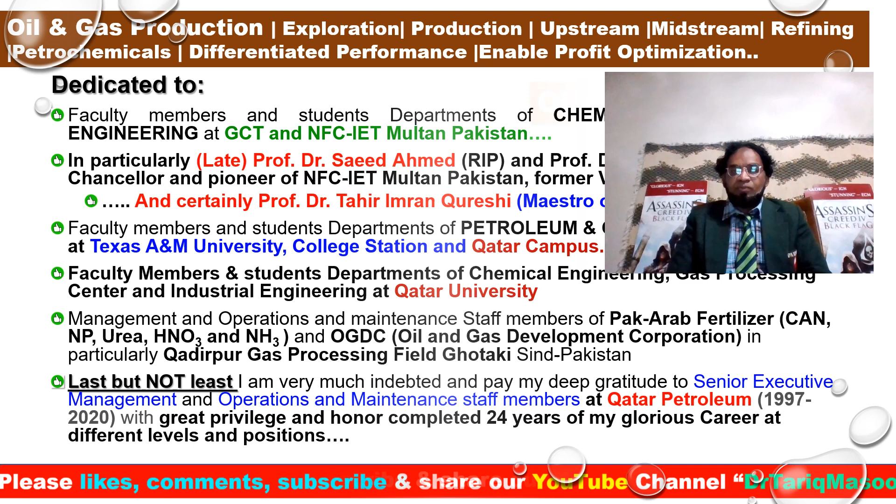Okay, oil and gas production, this is my plan. Introduction, facilities and process, reservoir and wellhead management system, upstream facilities, midstream facilities, refining facilities, petrochemicals, utility systems, unconventional, conventional resources and environment effects. These areas will be covered over the next couple of years. I have a plan to deliver 300 lectures.

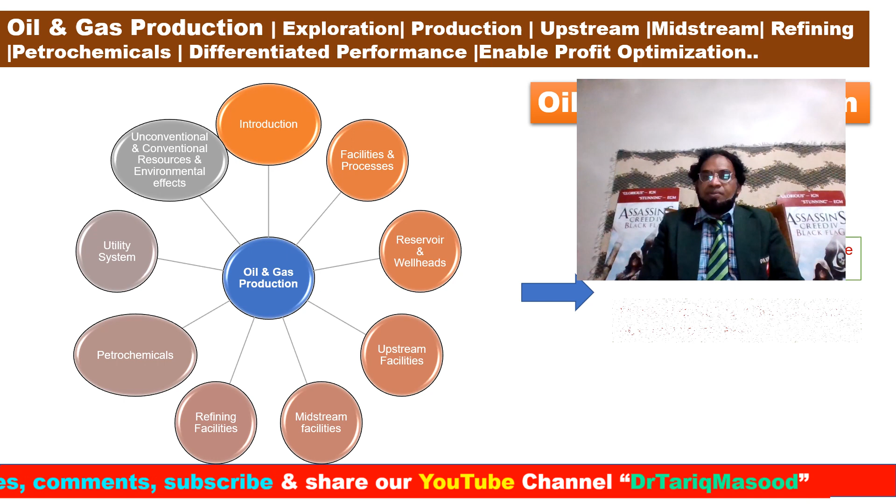Shaping the clean and sustainable global energy. Plan to deliver 300 lectures over the next couple of years.

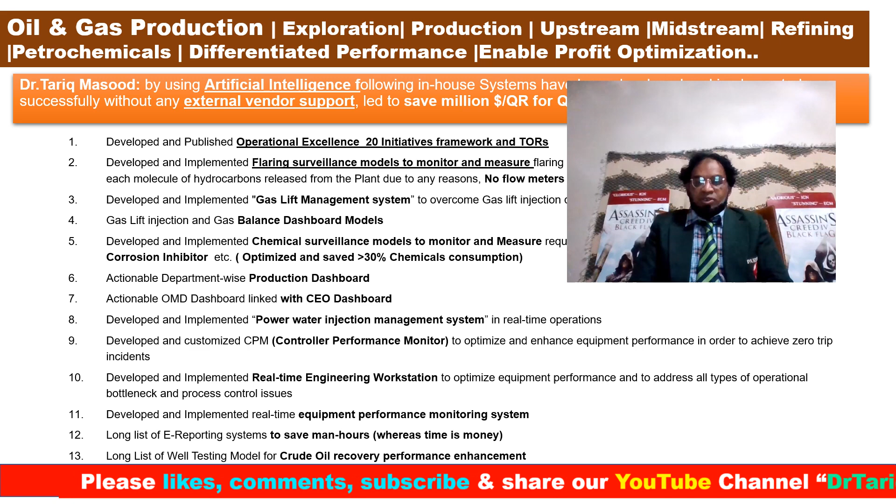Refining and petrochemicals, lecture number 7. From my next slide, we'll give you key takeaway points, and then we'll give highlights of what we plan to deliver today.

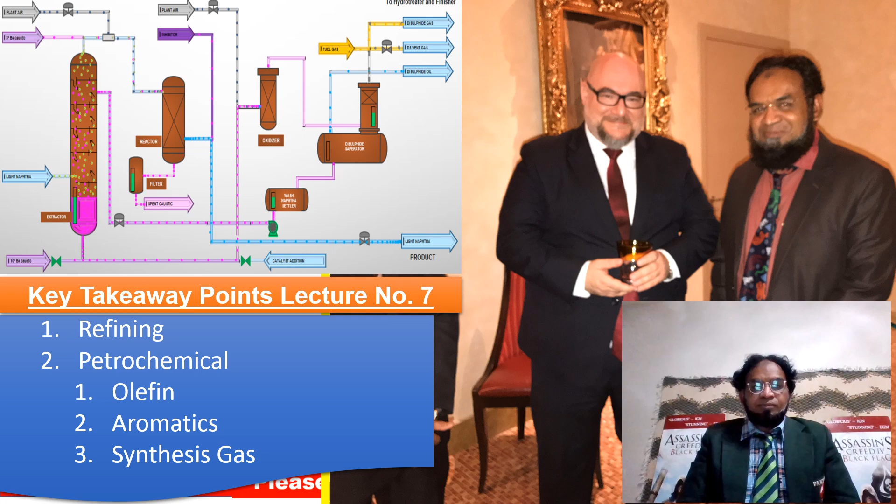Key takeaway points, lecture number 7. Oil and gas production, refining.

Specification, distillate column, blended to a suitable feedstock. Refining aims to provide a defined range of products according to agreed specification. Simple refineries use a distillation column to separate crude into fractions, and the relative quantities directly depend on the crude used. It is necessary to obtain a range of crudes that can be blended to a suitable feedstock to produce the required quantity and quality of the end product. The economic success of a modern refinery depends on its ability to accept almost any available crude with a variety of processes such as cracking, reforming, additives, and blending. It can provide a product in quantity and quality to meet market demand at premium prices. The refinery operation often includes product distribution terminals for dispensing product to bulk customers such as airports, gasoline stations, ports, and industries.

Okay, on my next slide, we will discuss what petrochemicals demonstrate.

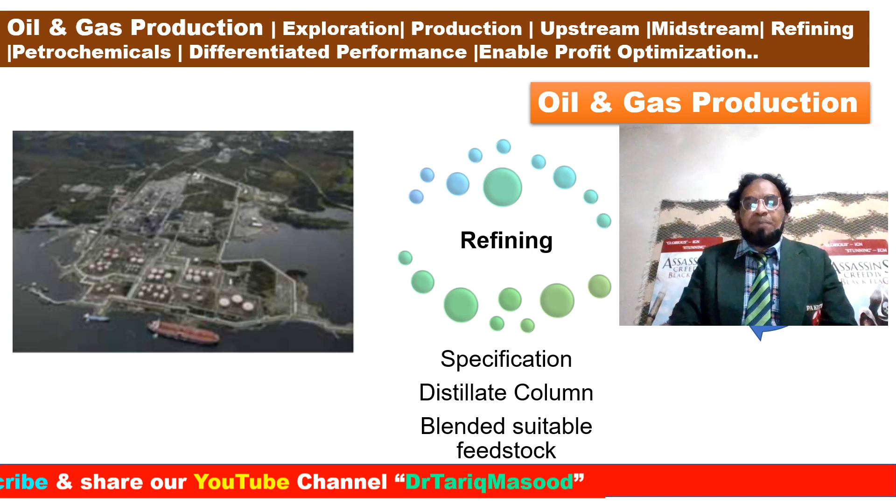Petrochemicals: olefins, aromatics, and synthesis gas. These are chemicals derived from petroleum or natural gas. Petrochemicals are an essential part of today's chemical industry. Petrochemical plants produce thousands of chemical compounds. The main feedstock is natural gas, condensate, NGL, and other refinery byproducts such as naphtha, gasoline, and benzene. Petrochemical plants are divided into three main primary product groups according to their feedstock and primary petrochemical product.

Number three is synthesis gas. Synthesis gas is formed by steam reforming between methane and steam to create a mixture of carbon monoxide and hydrogen. It is used to make ammonia, for example fertilizer, urea, and methanol as a solvent and chemical intermediary. Synthesis gas is also feedstock for other processes such as the Fischer-Tropsch process that produces synthetic diesel.

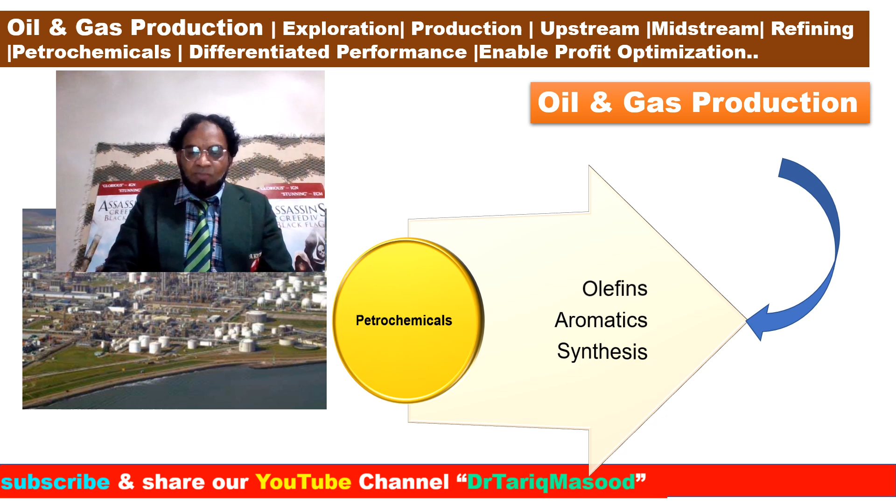Okay, this was my last slide. Next slide, we are going to move on.

Conclusion page. Today we have discussed refining products, petrochemicals, petrochemical components, olefins, aromatics, and synthesis gas. On my next slide, we are going to give you a brief about what I plan to discuss in my next lecture.

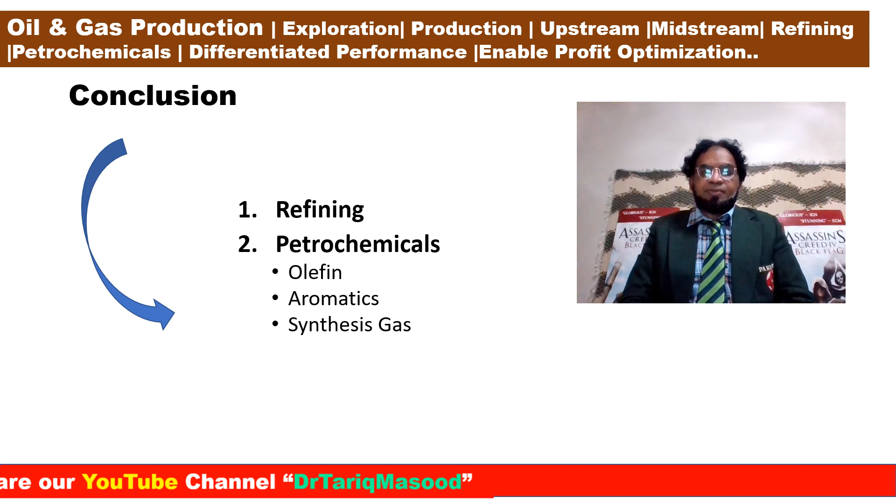Next topic: oil and gas productions, reservoir and wellhead, crude oil and gas, crude oil quality, natural gas, and condensate. Thank you very much for your precious time.

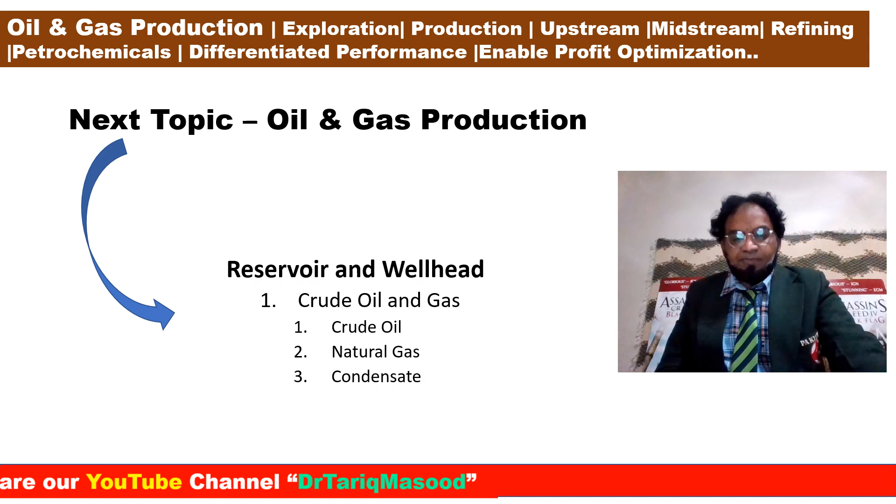These are a few references: Qatar Petroleum, Oil and Gas Development Corporation Limited Pakistan, World Energy Outlook, US Geological Survey, US Department of Energy, Schlumberger's Oilfield Glossary, International Energy Agency IEA, Wikipedia, Oklahoma State Oil Facts, and NORSOK Standards, Story of Oil in Pennsylvania, Air Liquide Gas Encyclopedia, Natural Gas from Wellhead to Burner Tip.